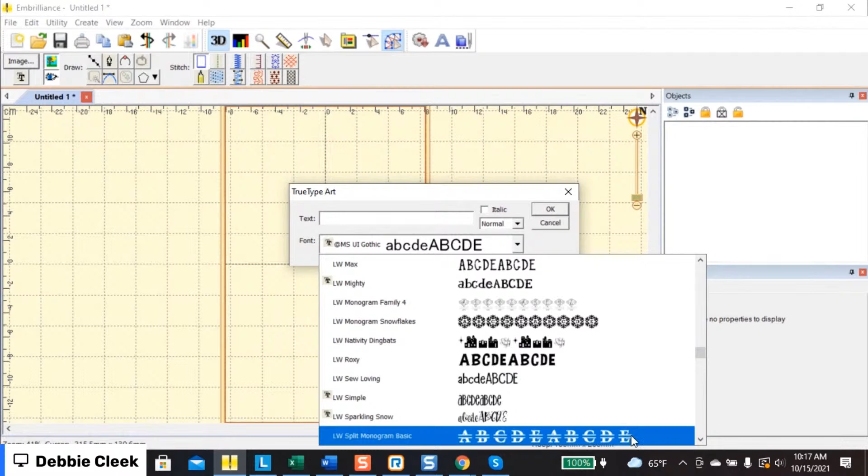The next tool here that we talk about is TrueType Art. That button, when you click on that, will open up all the TrueType fonts that you have installed on your computer. And that gives you access to virtually unlimited fonts. I'm just scrolling through these real quick. Oh my goodness, this is a split monogram, which is still really popular right now.

But look at all those fonts that I have, and a lot of these were preloaded onto my computer. Now, I've added to those, which is the beauty of using TrueType fonts. You can add to those, which is kind of fun. You'll see I had some specialty ones in there, some state frames and things like that.

So that would be how you would create your text in StitchArtist, and that is the same in StitchArtist level 1, 2, and 3. And now is also a good time to tell you that what you see in level 1 is also carried over to level 2. So when we move over to level 2, we're just going to cover what's installed or added in level 2.

Sorry about that confusion. The next tool would be the show or hide your background image. Let's see if I can undo this. Here's my background image. If I want to hide that, I have a show or hide background image button.

And then I also have a show or hide stitches. Let's come over here to our draw section and use our draw with points tool, and draw real quick some stitches. And this is your show or hide stitches. See, now you can see the stitch. Let's change it to a satin border and hide our stitches and show our stitches.

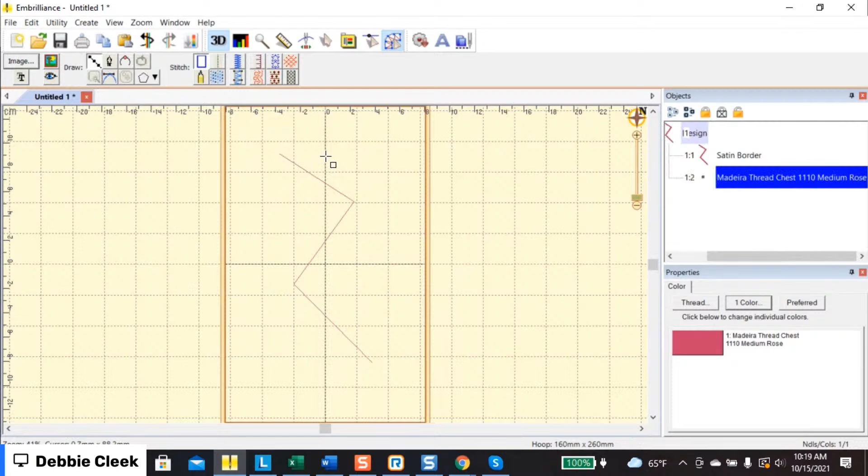Okay, our draw with points tool can be used to draw the straight line as you see here. It can also be used to draw with the curve by holding down the Shift key. So let's pick up that tool once again, hold down my Shift key, and you notice now my little nodes are circles as opposed to squares.

Hold down your Control key, and you'll notice your nodes are circles as opposed to squares. Hold down and right click when you're done.

Holding down your Shift key gives you circular nodes that you can then adjust your curve and cusp with. So your Shift key gives you one kind of curve, your Control key gives you full-blown drawing with curve.

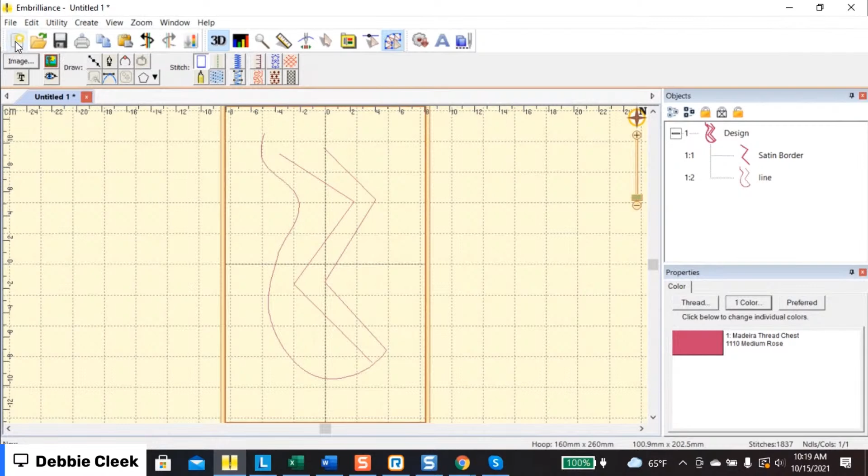Let's get a new page and draw a little bit with the freeform drawing or freehand. We'll click on that, and that allows you to draw freeform.

But you see all those nodes there? Wherever you have a node, your needle has to make a hard drop. So this would require quite a bit of digitizing before it's ready to go to the machine.

That's why we always recommend, if you're using the Draw Freehand tool, use it sparingly and practice a couple of times before you do it to make sure you have a nice fluid movement. The more fluid your movement, the less nodes you'll have.

See that right there already has less nodes than the first one because it was a little bit more fluid and quicker.

Okay, I'm going to get another new tool. We'll go through quite a few pages as we're going through this, so don't be alarmed. The next tool is drawing a 3-point circle or an arc.

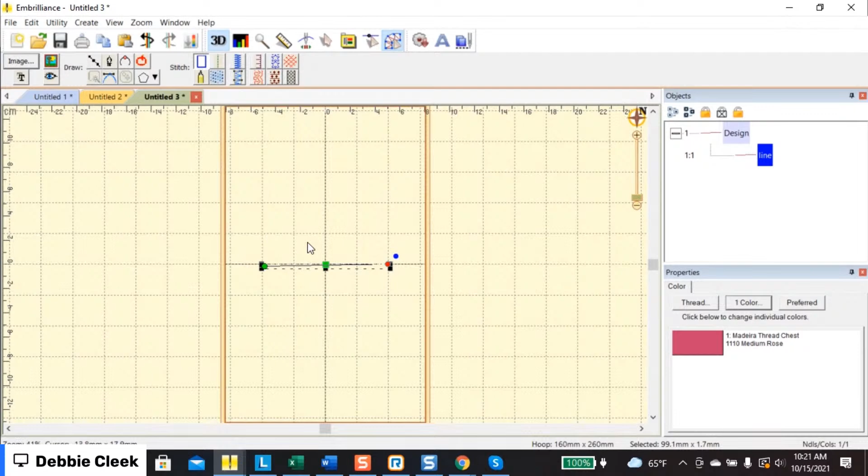I'm going to click on that tool, and for that I'm going to click here and draw it up. Let's delete that. I right clicked when I should have clicked.

There we go. There's our arc. Now you see I still have that tool there, so I can click and make more arcs if I wanted to.

Apply a running stitch to that and make like a stippling. That would be fun, but make sure you're showing your stitches. There we go.

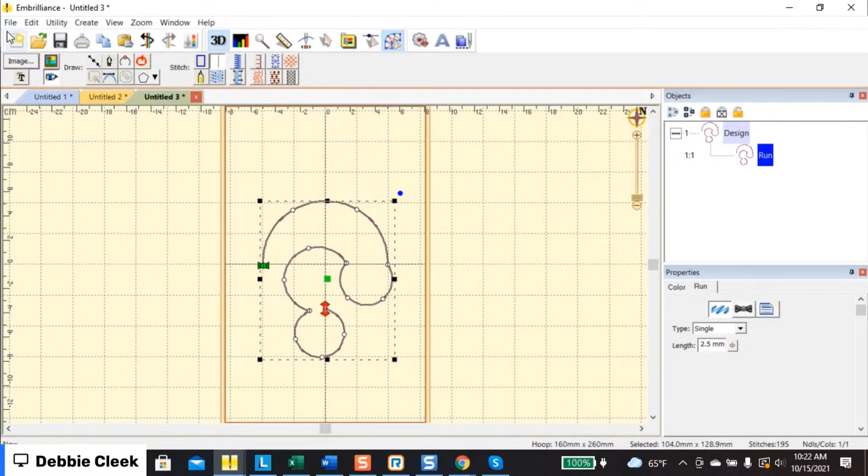Okay, we'll get another new page. The next tool is the automatic closed shape tool. So let's go back here to where we drew our first one.

Let's select this tool here, and let's click on our open close shape. You notice how it automatically closed that shape?

You see that? Now I can also open that shape, and I can close it again. So remember you've got an open and close shape tool as well.

You also have a magic wand. Now, this magic wand I won't show you—I don't have any artwork to magic wand with, but I will explain it to you. The magic wand that comes with this is called a shape magic wand.

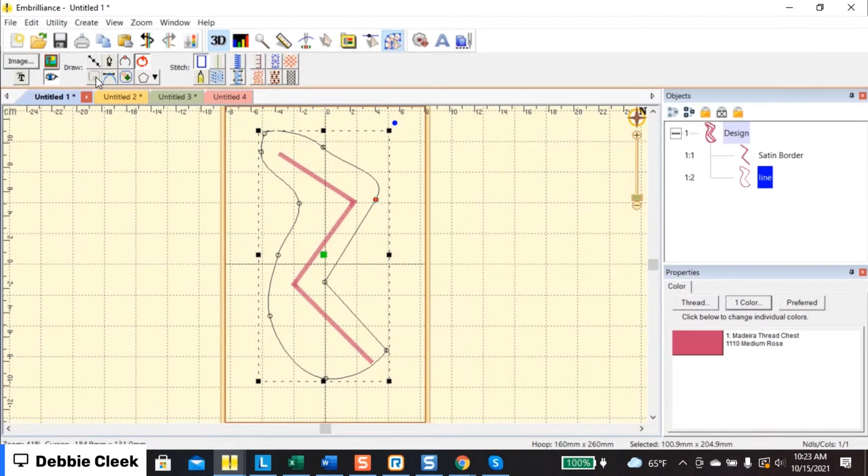It will give you the outline of the shape that's selected. So when you have, well, maybe I will. Let's see. Let's go here to page 4. Let's go to image.

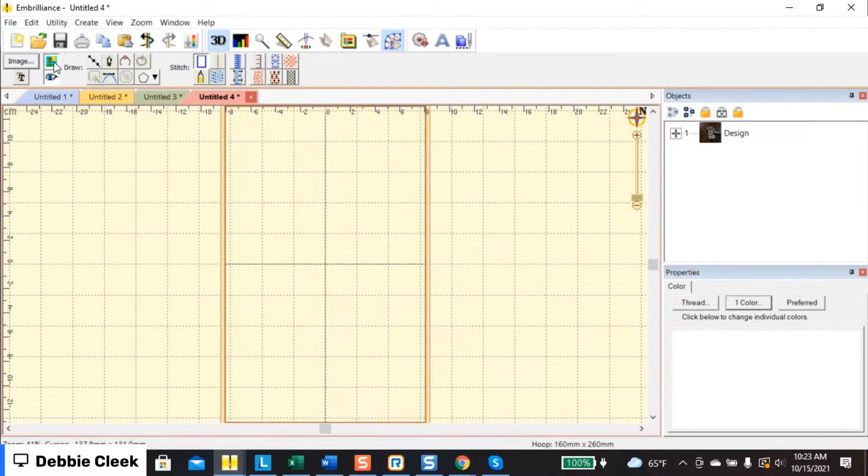Show our shape. Okay, now I'm going to use my shape magic wand.

It is going to look at the different colors and try to give me a shape based on that, but this actually is my desktop, so it's got a bunch of different wood grain colors, so you're not getting a clean outline. But imagine if you had some nice, clean, crisp artwork—what a lovely job that would do, giving you an outline with just a single click of the mouse.

Let's get a new design page. This one here, your line edits as a spline with handles, or with a spline with no handles, or a bezier with handles. So let's draw some

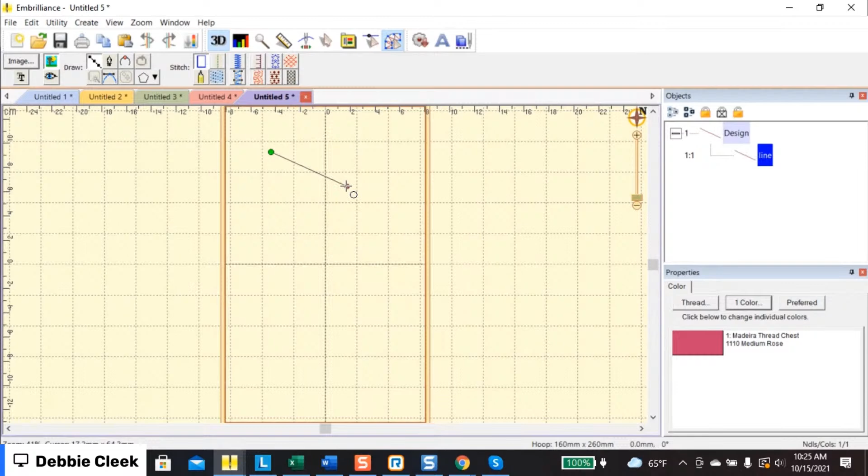lines with curve, and it's my closed shape line. My closed shape tool is turned on, so I've got a nice closed shape. That's a better shape to work with, so to see.

And you see these handles here? With the Bezier, these are my Bezier handles, and they allow me to adjust my curve without adding any nodes.

Now, if I turn that on or off, if I turn off the Bezier handles, then you don't have the handles to adjust by.

And the only way then to adjust this shape is by adding additional nodes. Now, remember what I said earlier, wherever you have a node, that needle needs to make a hard drop.

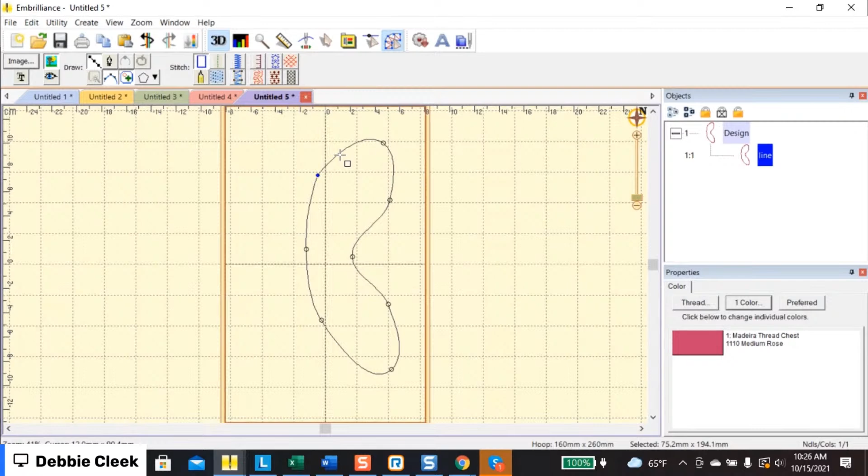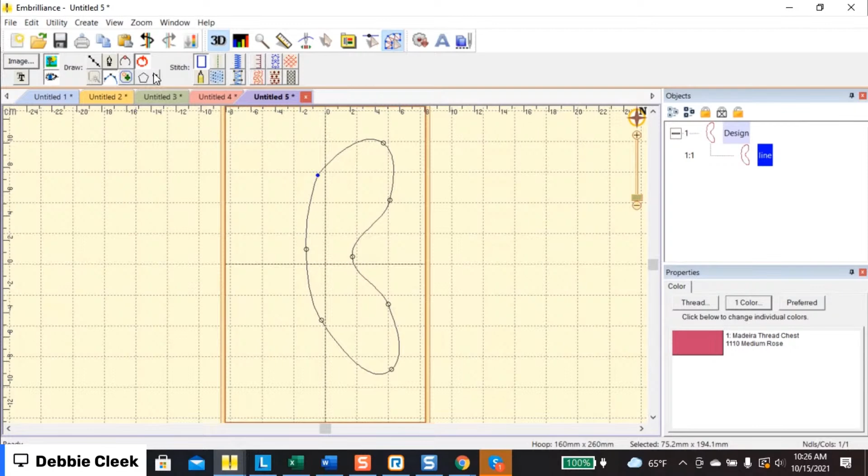So the fewer nodes, the smoother your overall artwork will be, and the smoother your overall stitching will be. Okay, now that we have a shape on the design page, let's add a hole to that shape. And I'm just going to come up here and draw a circle with my automatic shape tool.

Okay, now I'm going to hold down my shift key and select both of these. And then I am going to right mouse click on, hold down my shift key, select both of these.

Select both of these, right mouse click, combine with hole, and now I can fill that with some fill stitch, and you see I have a hole in my area where there will be no stitches.

I don't know why that section always gives me a hard time. It's create your area, add your hole, select both areas, and then right mouse click and select combine with hole. It's a very simple process.

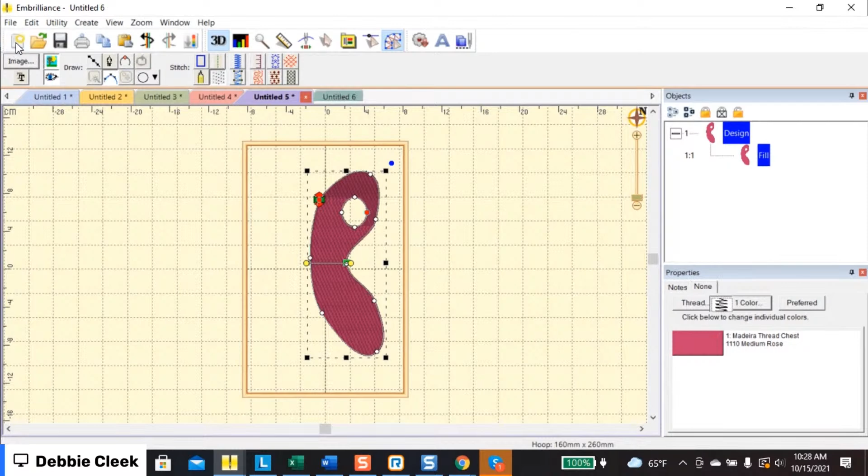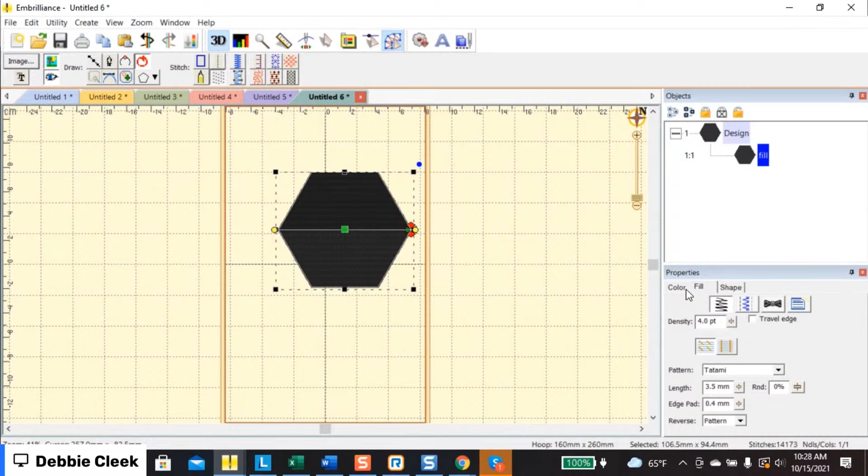Now, the next tool we're going to talk about is the automatic shape drawing tool. I can draw a rectangle, a circle, a polygon, a spiral, or a star. And the beauty of that is, let's just draw a polygon real quick. And actually it's 6-sided, so what would that be? And it's filled. Instead of turning the fill off, let's just change the color.

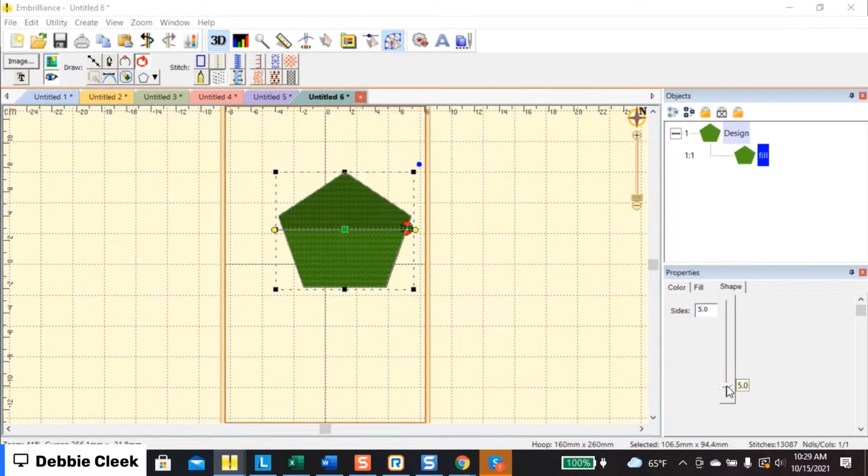Now if I come over here to my Shape tab, I can adjust the number of sides I have. So if I wanted to make some tessellating designs, it's very easy to do with these quick and easy to make shapes.

Now I can tell some of you are looking at this and wondering why this line is in the middle of this. That's because my start and stop points are basically in the same place. Let's take my stop point and put it down here at the bottom. Let's take my start point and put it up here at the top. And you see that section is gone.

Okay, who's ready to look at stitches? I know I am. We've covered the image part of the drawbar. We've covered the draw part of the drawbar or tool pane. Now let's cover the stitch part. Let's start with the shape we already have drawn and talk about the fill stitches. When you click on your fill tab, you have a pattern option here where you have a number of different patterns you can select from.

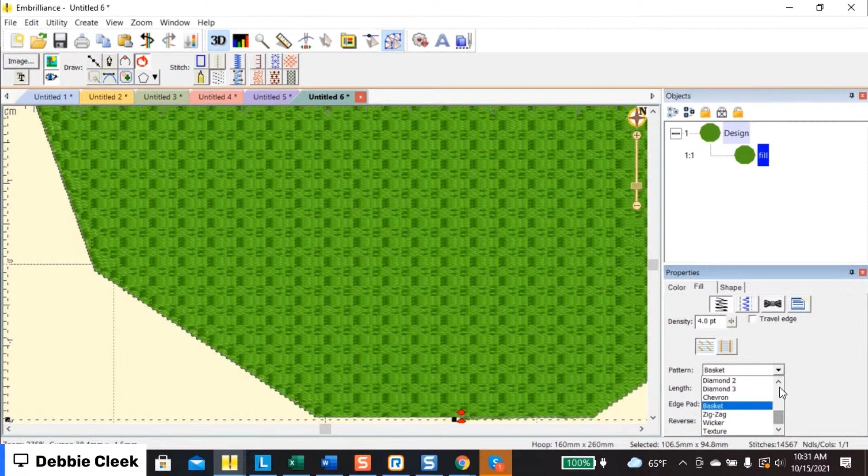That's the basket weave. My personal favorite that shows really well is the waves. So this is a quick and easy way to add texture to a design without having to spend a lot of time, and give an overall pattern to your design by changing to a different fill stitch.

Say you were making a boat and you wanted to put a little rectangle at the bottom and have some little waves in there. You can rotate this pattern as well, or rotate the shape. Either way, it's rotatable.

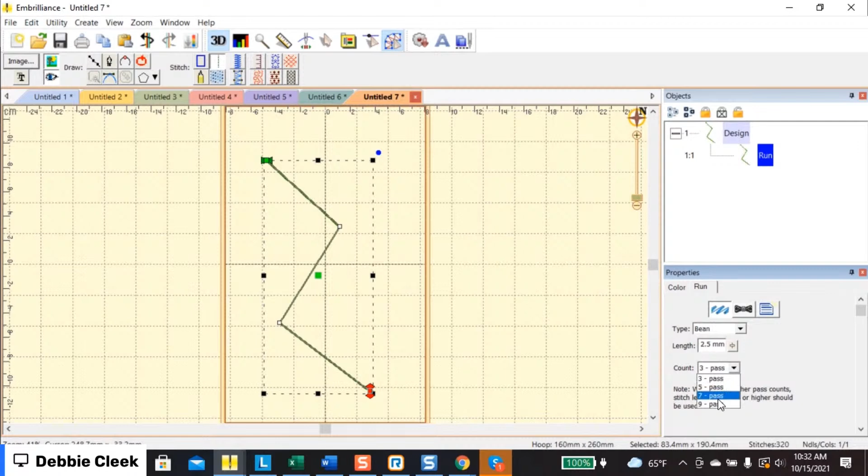Alrighty, for the next one, let's get a new page. You notice I keep going back to my draw with points, and I'm just going to draw a shape, and we're going to go to the run tool. With the run, I have a single run, a double run, a bean stitch. With your bean stitch, you have a 3, 5, 7, or 9 pass, which means if you want to make some of those big floss looking designs, you can with your 9 pass.

Just remember to lengthen your stitch, otherwise you're going to have all that thread bunched up in a short stitch length. So you want to lengthen your stitch to at least 4 millimeters or higher, as it says in the note here. See, we give you handy notes to make sure that you don't run into a knuckle like I did.

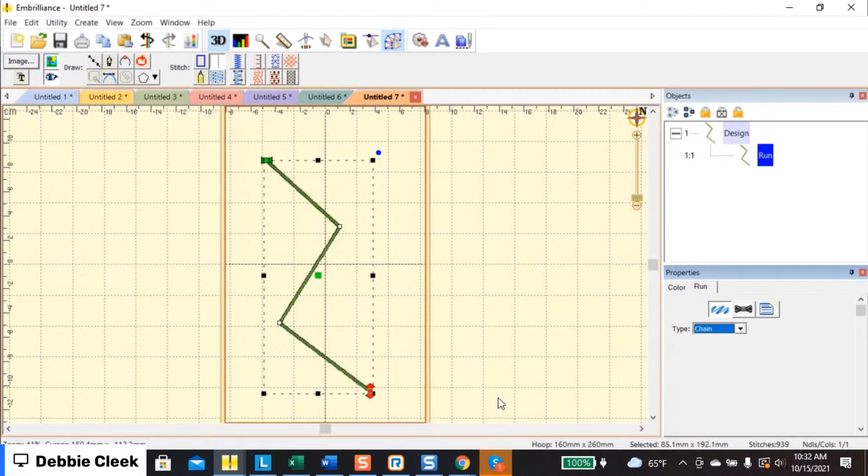Okay, after the bean stitch, we have a chain stitch. Let's zoom in on that so you can see what that looks like. We have a back stitch, a stem stitch, and finally a faux sashiko stitch. This is designed to look like a sashiko stitch.

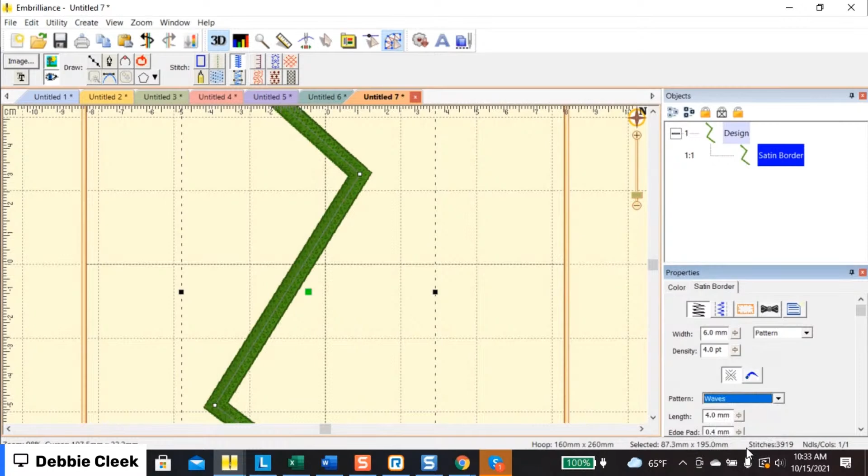Okay, from there we'll select that design, that line, and move over to the satin border. We'll zoom in a little bit, but not quite so much. What I like about the satin border is you can apply texture by applying a pattern to your satin border as well. If I made this stitch width wide, let's make it 6 millimeters wide. Then I can apply waves to that. Let's zoom in on that so we can see.

Let's go back to our regular tatami. You can also feather your edge, make it a 3-pass whip or a 5-pass whip. You can also make it a split stitch if I wanted to make this a 3-column split. There, see, that can give you an interesting look, kind of gives you a ribbon look.

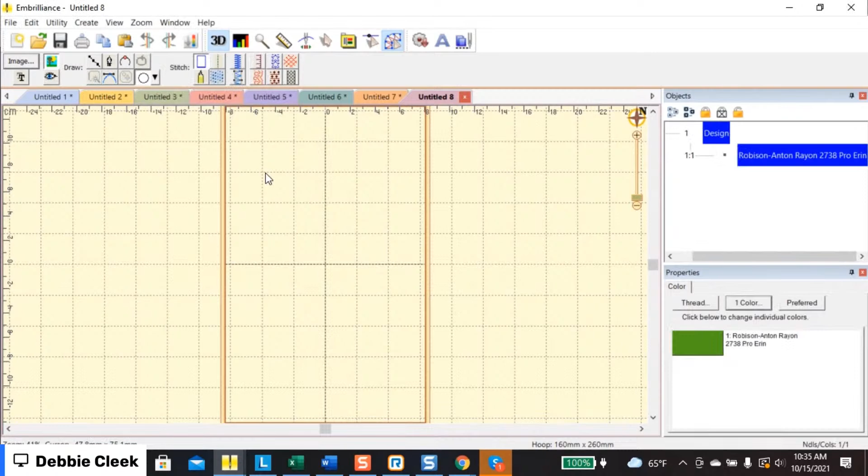Okay, let's get one more new page. I'm going to come over here and I'm going to get a shape. I'm going to bring in a circle. We're going to talk about applique. With applique, I can make a one-click applique, and then I have the option of selecting from the E-stitch, the blanket, the satin, the zigzag, or none if I wanted to do some raw edge applique. So you have several options there.

You can also do a fabric preview. You can do a position as well as material placement stitches as well. So a 2 or a 3-step applique. Okay, so that is your applique.

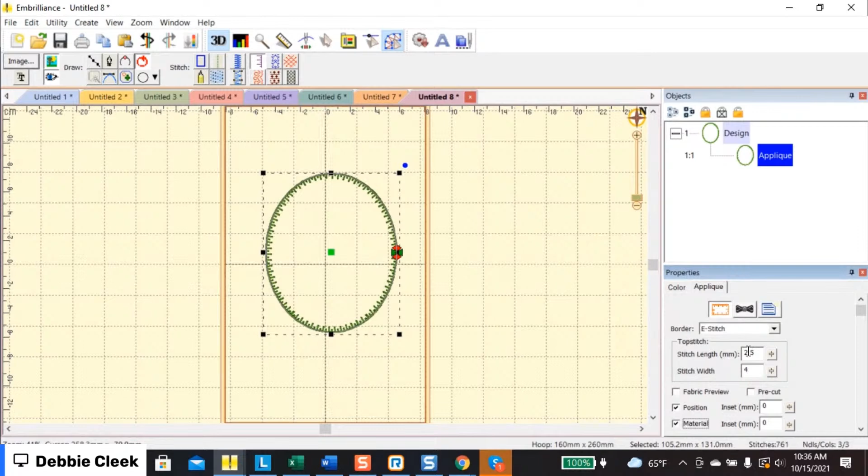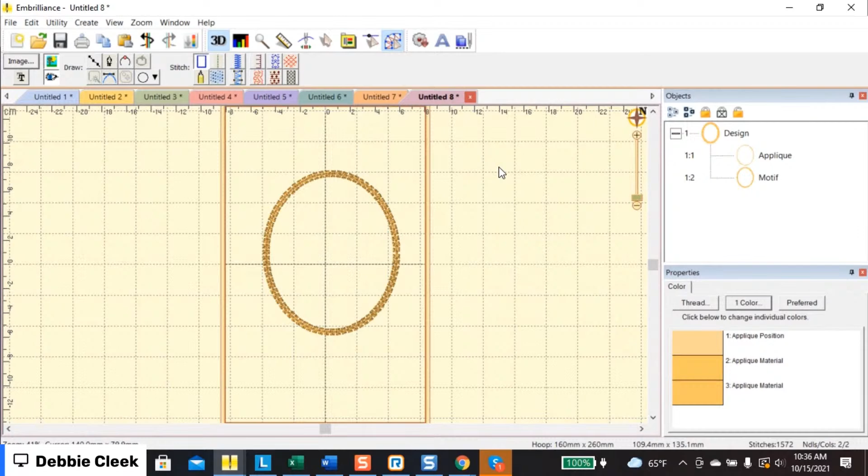Now, say I wanted to leave off my top stitch, make it none, then I could copy this and paste it. Then I can come over here to my motif run and put that around my applique. Let's zoom in on this so we can see it a little bit better.

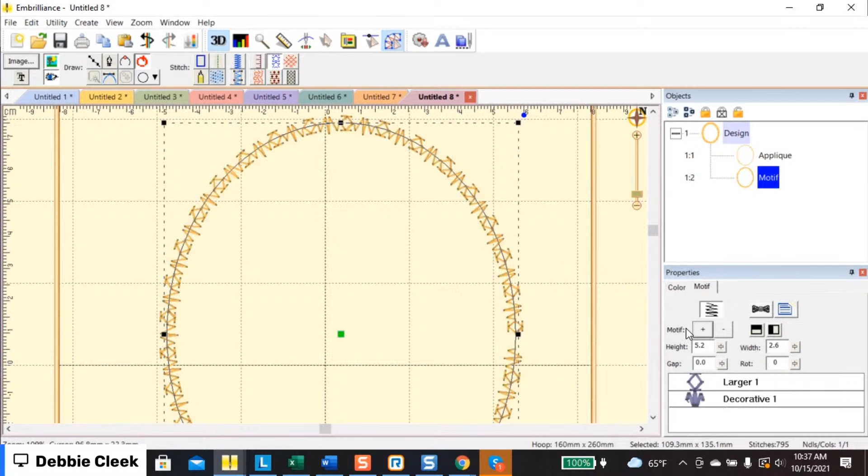Okay, now with that, I can also add, let's go to decorative. I can adjust the size of that particular one. I can go to motif and add a different one. I can add as many different motifs as I would like to get just the look I'm looking for.

Okay, so that is your motif fill, or your motif run, I'm sorry. That is the motif run. Right below it is the motif fill. And we'll talk about that one in just a few minutes. We'll work our way over to that one in just a few minutes.

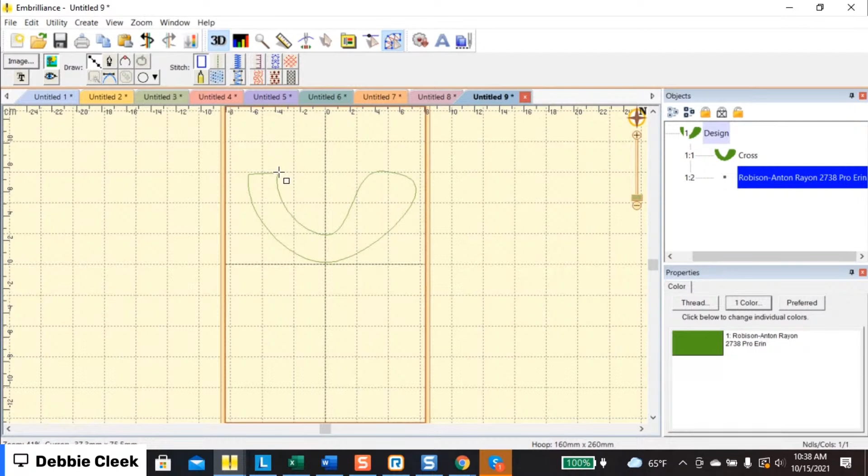The cross stitch area. Let's get a new page. I'm going to hold down my control key and draw. Close my shape. And I'm going to fill this with cross stitch. And then I'm going to come in here and use my draw with points tool again, holding down my control key, making a curve shape. Close my shape again. Let's adjust this a little bit here. Let's see if my Bezier handles are on. Yes, they are.

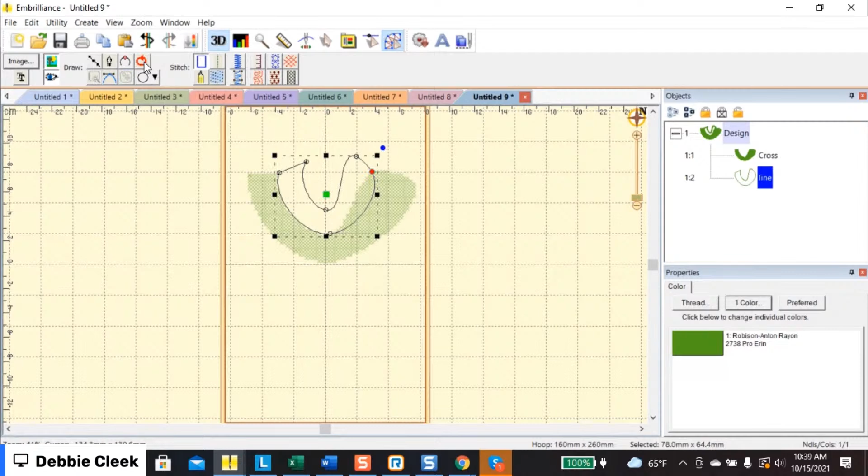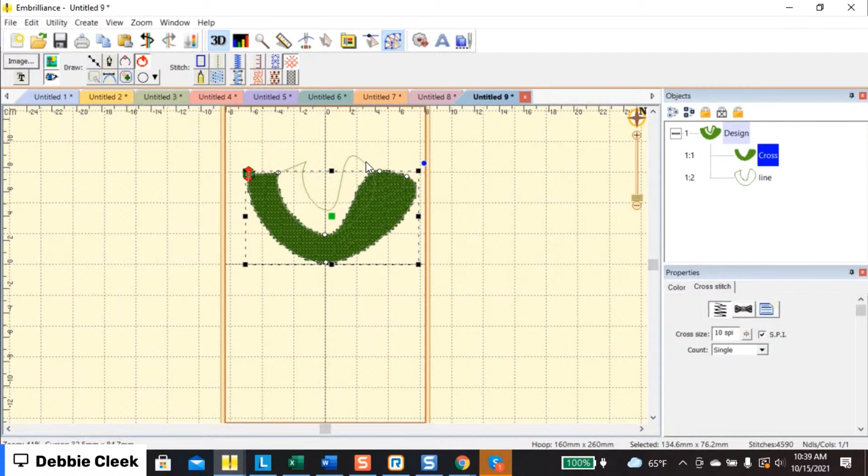So I can adjust my Bezier handles. And let's change the color of that. And let's zoom in so you can really see how those X's all work off the same grid. So if you were trying to make a design to mimic the look of counted cross stitch, it's very easy to do that when it works off the same grid, so you can draw all your areas. And if you look right here, you can see how those X's match up.

Okay, now we've talked about the fill stitch already. Let's talk about the satin column. There we have it. You see you have a satin stitch that contours all the way around the shape of the object. That is your satin column.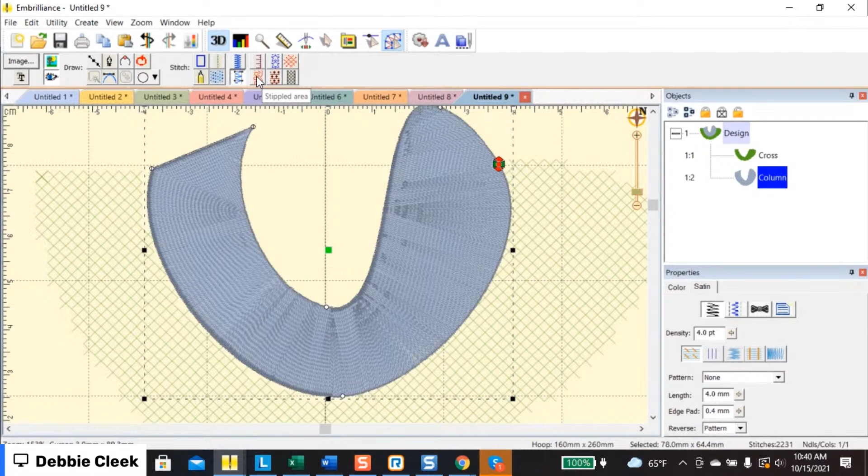Stipple area will fill that area with stippling, and there are drunkard, curvy, leafy, and geometric stippling styles.

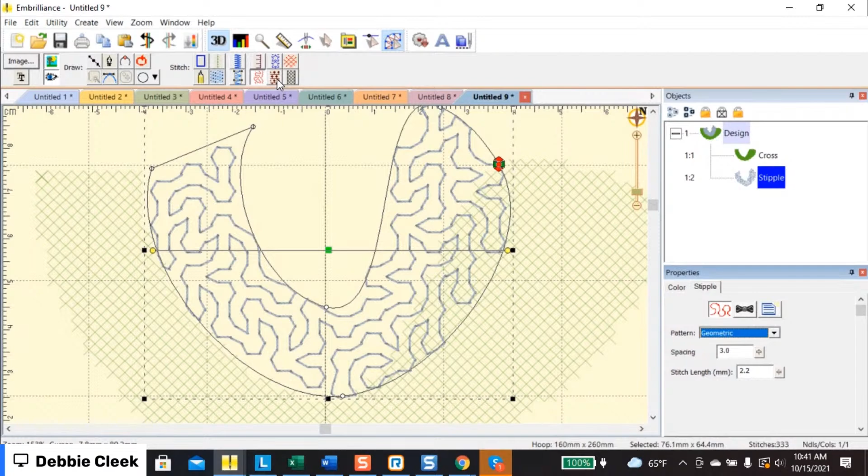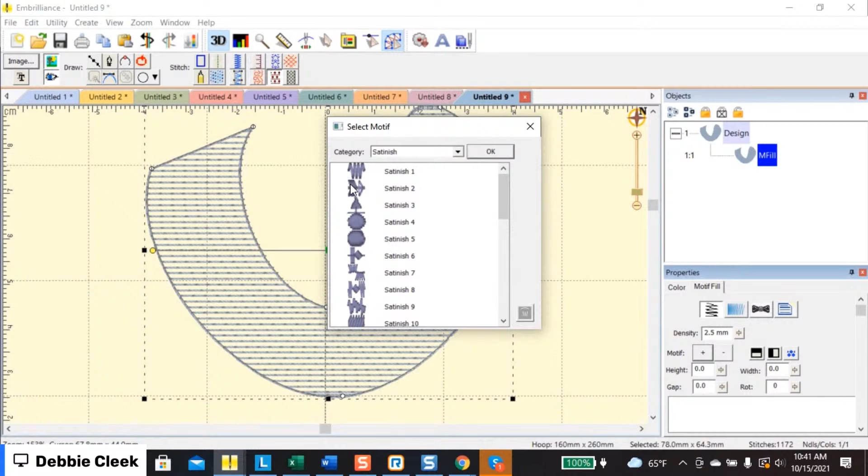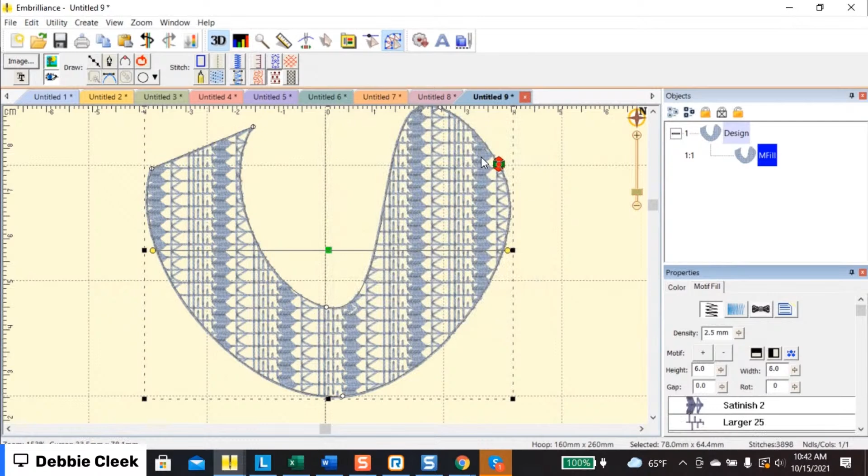Oh, now we're to motif fill. Let's delete one of these objects so it doesn't get confusing. With motif fill, it works similar to the motif outline, only I am filling a shape with the motif. So I can come up here, I can select my first motif, and I have the arrows. Click on plus, go to larger. Let's scroll down. That's interesting. Let's add one more.

Let's zoom in. Let's add some space between those. Let's make this one a little larger. Actually, let's delete this one and select a different one. There we go. So it's that easy to work with the motif fills.

Let's get one more new page, and now let's talk about freestanding or quilted fill. Everybody likes to make freestanding lace, and with StitchArtist level 1, it's very easy. Let's come over here and use our quick shapes. Let's make an oval, and now it's filled with freestanding lace.

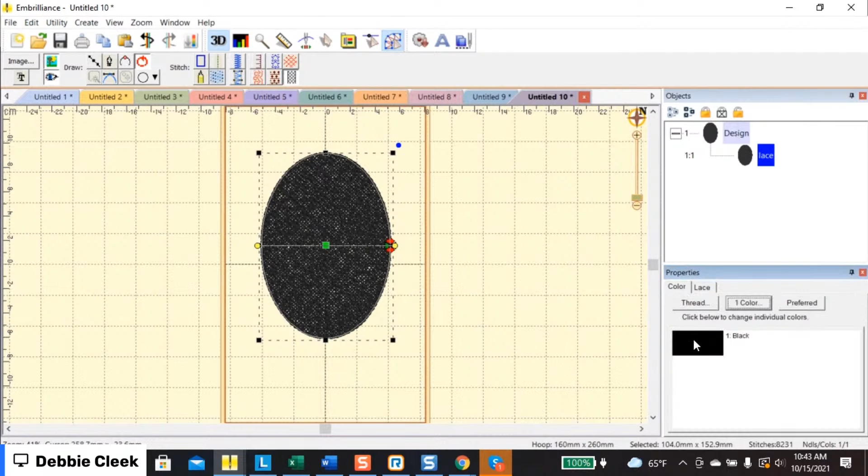Let's change the color. With lace, here it is. Here's my density, here's my stitch length, here's my pattern, freestanding double. Or if I wanted to make it single, which is not freestanding, I can then adjust my density, and I could use that for some in the hoop column quilting.

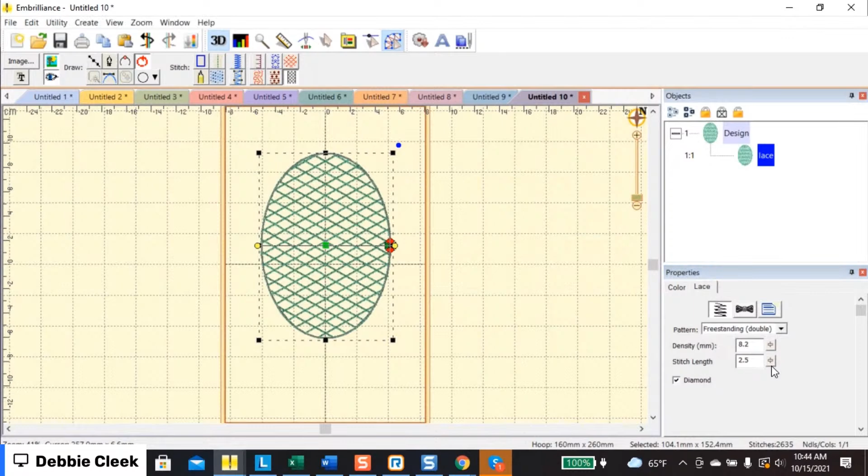Kind of like echo quilting. I can also switch it to a diamond pattern, go to freestanding lace, and then put your design or your swirls or whatever you want on top of that. And then when you rinse it, you'll actually have like some making your own fabric. You'll have a lace piece that you can attach on something else.

Okay? So let's see, we touched on in this session, we did an overview of the image tools. We did an overview of the drawing tools, and then finally, we've just finished up with the overview of the stitch tools.

Now we're going to move on to level 2 and go over those tools and do an overview of those as well. So those of you joining us a little bit late, we've just finished our overview of our level 1 tools, and we're going to start with our overview of our level 2 tools.

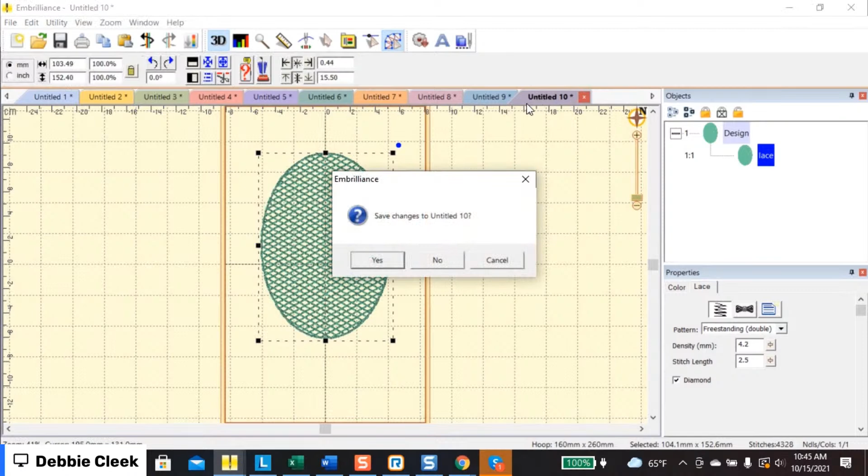So I'm going to click on my create button. That's going to give me, since I have a special version, that's going to give me the level 2 tools, and I'm going to close some of these design pages, so we don't get confused when covering the level 2. Let's get a new design page. Let's go to level 2.

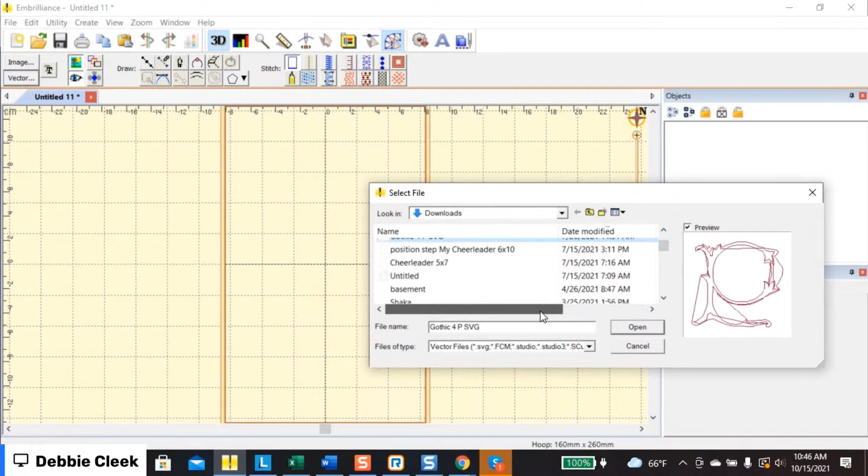Okay, you'll see right away we have a new button. We can bring in vector art. Vector art, so that means SVG. Well, let's see, let's go back here. That means I can bring in SVG, FCM, Studio, Studio 3, SCut 4, EMF, WMF, and AI. So SVG is the most common. Scalable vector graphic is the most commonly used, I think, in today's graphic arts world.

So that's probably the most easily found artwork to use for digitizing. But a lot of these, like the FCM, the Studio, the SCut 4, those are for the Brother Scan and Cut, the Silhouette, and the Cricut. And then these EMF and WMF are just some commonly used graphic formats. And I think AI, that's Adobe Illustrator. That would probably be your last resort if you were looking for some artwork to bring in, only because it's very version specific.

And I don't know how current a version of AI we currently bring in. But that is one of the things that is added with level 2, is the ability to bring in vector art. You also have here sequence objects by selecting them one at a time.

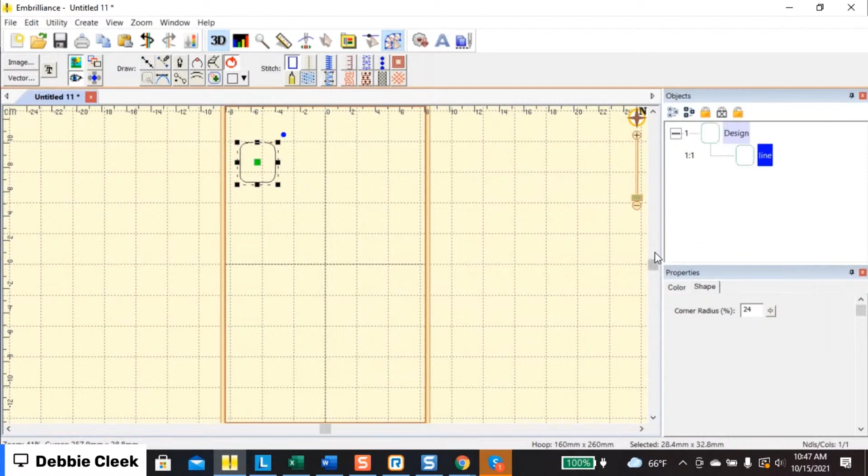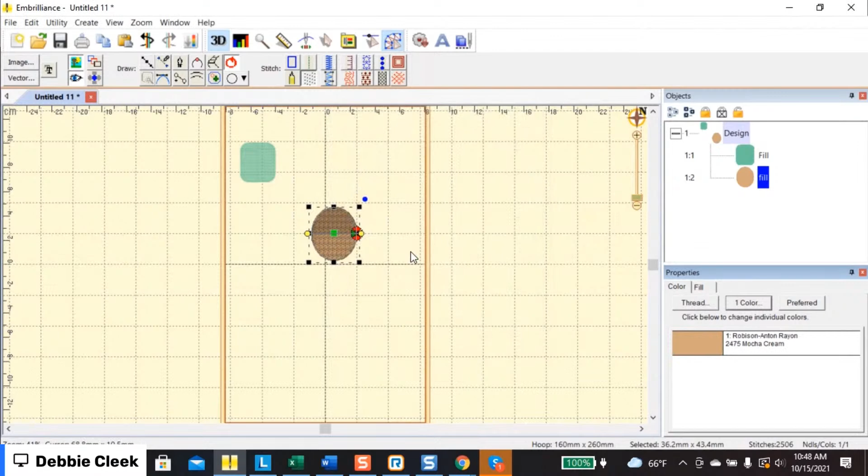So let's put some objects onto my design page so we can show this. I'm just going to do a square and fill it with some color. Let's do a circle, let's fill it with a different color. Let's come over here and do a polygon, and to keep from being confused, let's reduce the number of sides down to 6. Let's change the color of that one as well. And one last, we'll make a star.

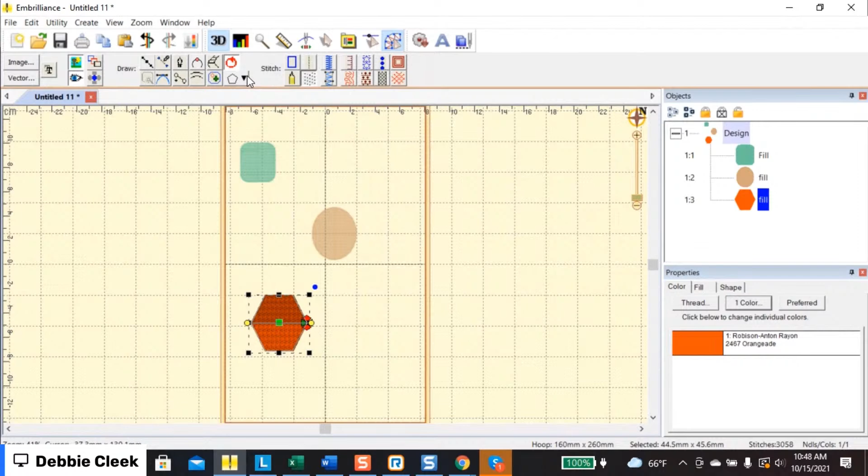So I'll come over here and select my sequence objects by selecting them on my design page. Green, and it will adjust the sewing order. So let's go back and do that again. Green, orange, tan, and blue. Green, orange, tan, and blue. Just by selecting on the design page my sewing order. So there are times that can be so much simpler to do it that way.

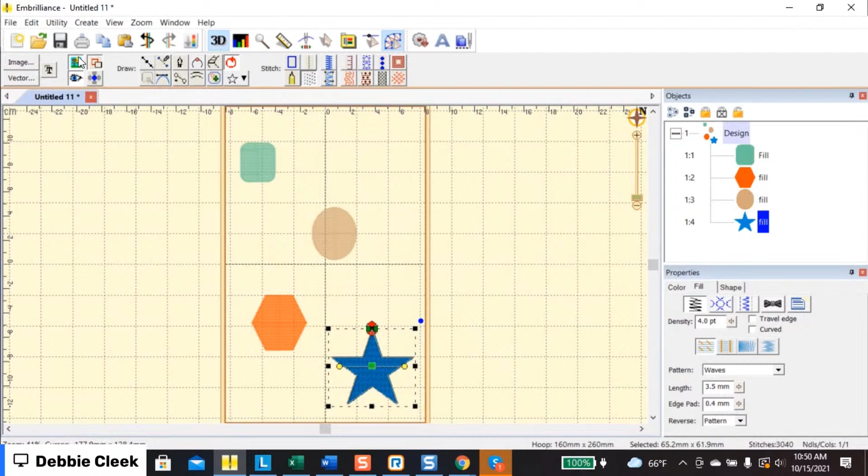What else is added? The ability to draw with the Bezier. Let's get a new design page so we can talk about that one.

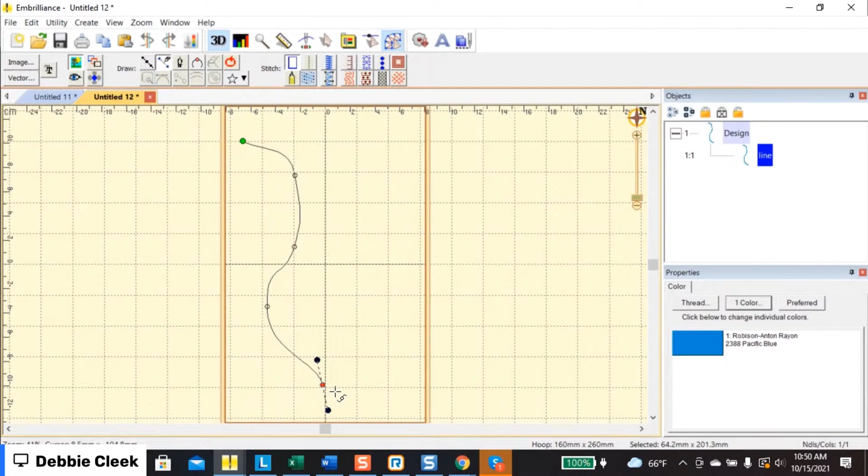Before you could draw with the curve, now I can draw with the Bezier, which means I have the handles that allow me to click and drag and create my curve as I go, making a nice S curve. Right click when I'm finished. That is the Draw with Bezier.

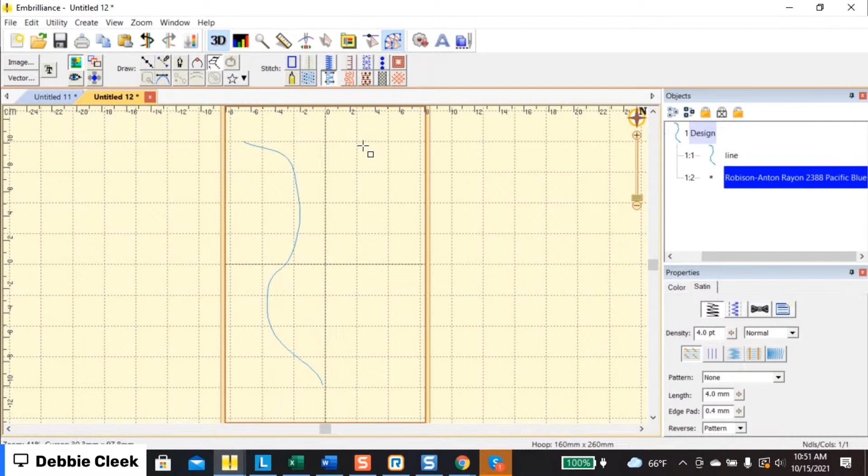The next tool that is added is Draw a column with left and right alternating input. This is great for making, well, let's just show you, making a satin column go around a curve. And then I can come over here and select these and edit them.

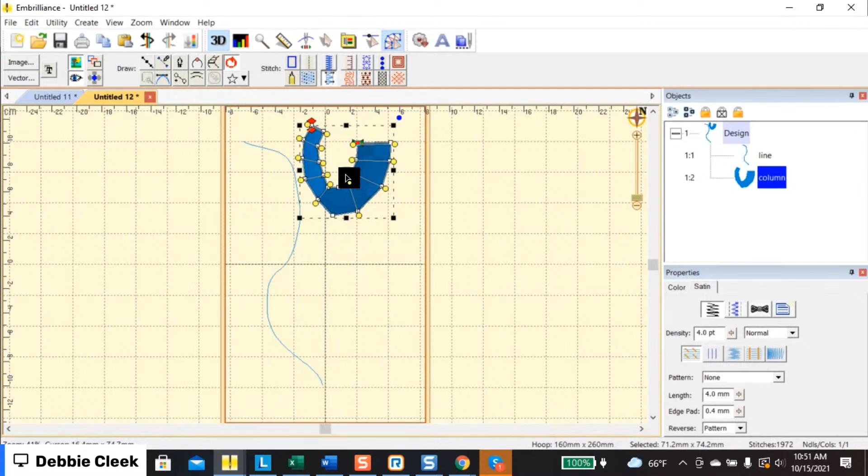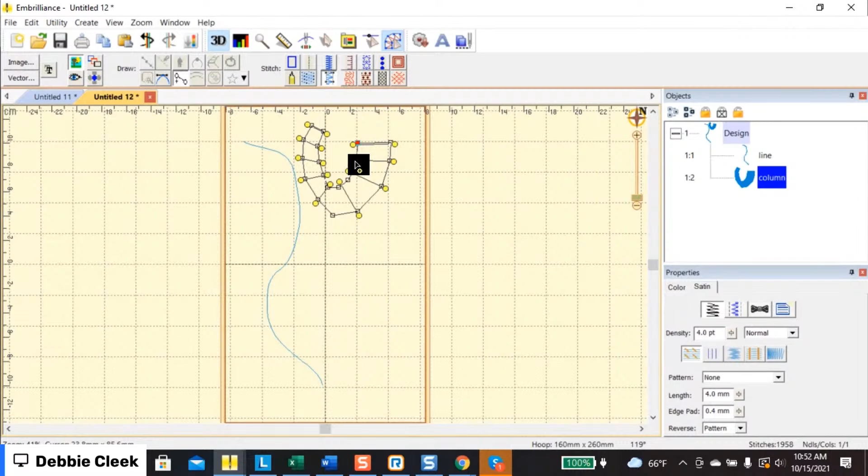These are my inclination lines, and that has been added, so I can add inclination lines. So if I wanted to take these off, I can add, let's take this one off too, and let's add one right here in the center to make that transition a little smoother. These inclination lines are fully editable, which means I can edit them, move them around and adjust them however I want, or I can also add additional ones. Right click when I'm done, then I can edit the ones that are there.

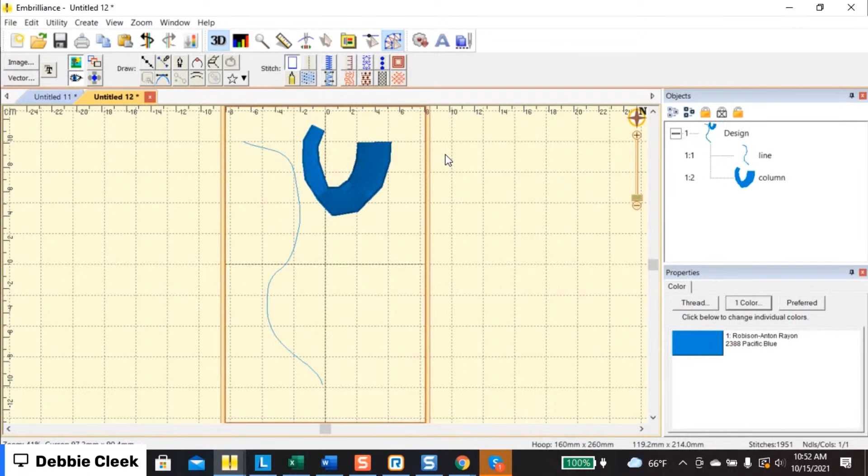Let's zoom in on this and see what we got. Not too bad the way it goes around that curve.

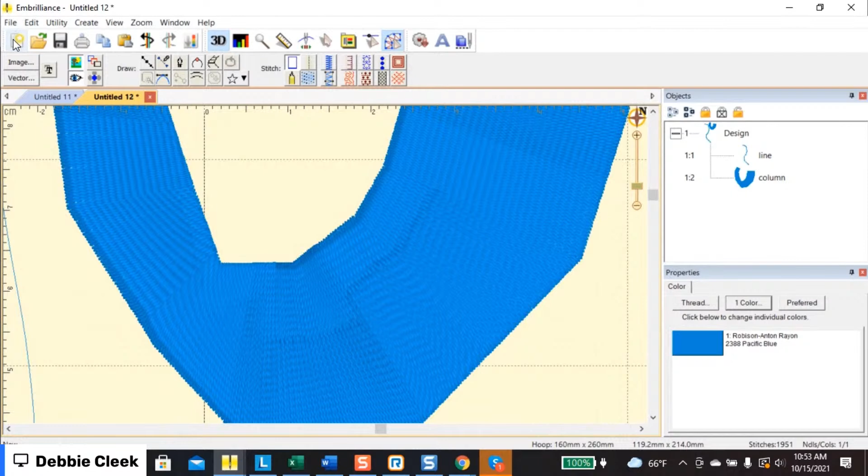The next tool that's new in level 2 is the draw a column by making two sides. So that is good, it's right now it's jack-o'-lantern season, so it is a lot of fun to use that tool.

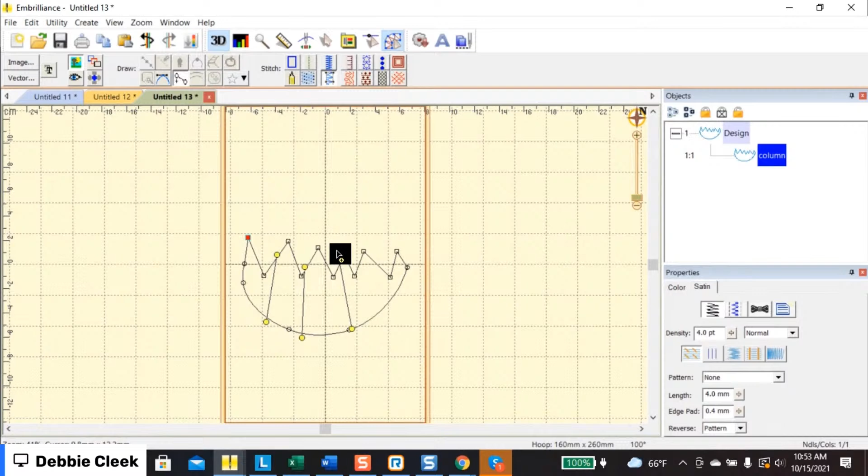I draw my top, then I right click, and I draw my bottom, then I right click and it connects these two together. And now I have my inclination, so I can draw my inclinations, because with level 2, what was added? That's right, the ability to add inclination lines. So I can add my inclinations here, right click, and there it's finished.

Okay, let's get another new page. Now that, I believe, is all that has been added in the drawbar in level 2. Remember the draw with Bezier, draw a column with left and right alternating input, and the make a column with 2 sides, and the ability to add inclinations.

Okay, now over here in the drawbar, you have the ability to draw with motifs such as French knots and candle wicks. Let's select candle wick. I can make these larger. I can make the end size smaller. I can adjust the gap between them. Or I can make them all the same size, and I can also switch to French knots.

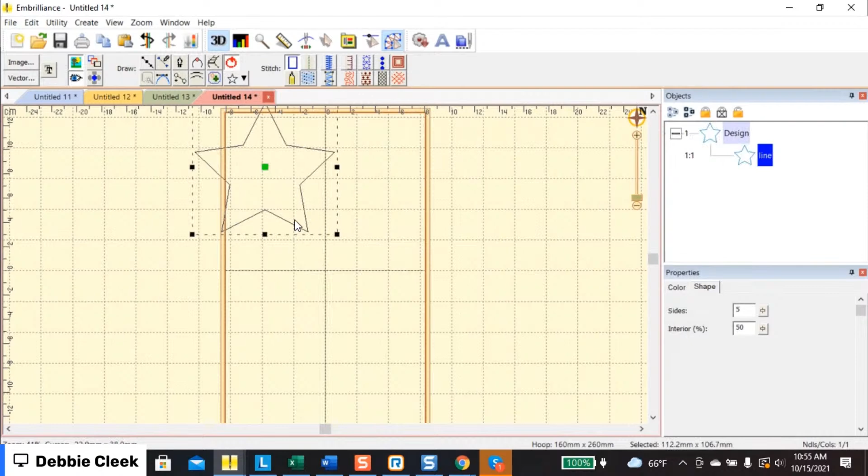The next one is contour fill area. So let's just delete that page. Let's come over here and grab the star. Let's fill it with some contour fill.

Let's go to our contour tab. Let's make it gradient. And let's not clip the shape. See how it's far apart in the middle and it gets a little bit closer on the outside? We can reverse that. Maybe not quite so much. There we go.

This slide bar here adjusts the offset, the spacing between each one of them. So each level of stitching, I have an offset, and that will adjust the distance between each row of stitching.

I can echo outline inward, interior clipped, or outward. So if I want to do some echo quilting, I could just echo that outline outward. And there I have some quick and easy echo quilting if I were doing some quilt blocks in the hoop.

Okay? What do you think of that? I think that's a pretty groovy feature. I really like the echo quilting option.

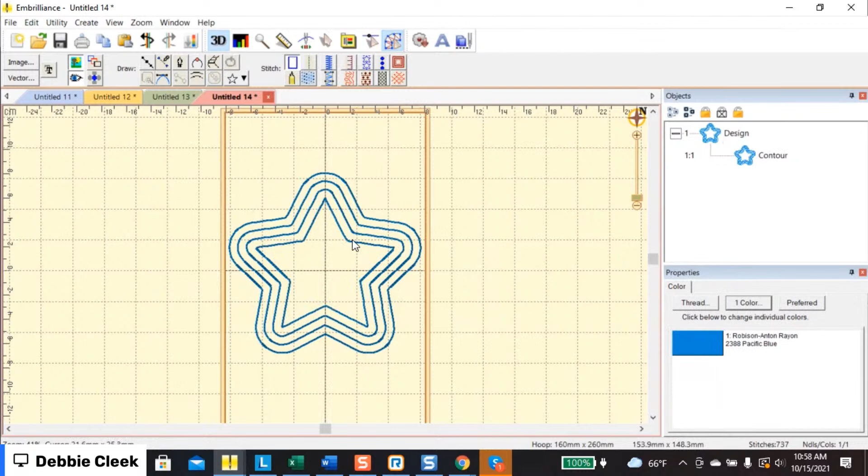And I believe if I select each one of these rows of stitching, convert to curve. No, it's not what I want. But you can make each of these, just in case one of you were wondering, because I know someone out there was wondering if you can make each of these a different stitch. And yes, you can, that is a possibility.

I would show you, but I've got to hurry off to show StitchArtist level 3. So let's click on the little icon here. This is StitchArtist level 3, and you'll see a whole lot has changed. A lot I'm just going to explain to you because there's not a whole lot to see with this.

In your image window, image bar, you still have your show or hide background image, your show or hide stitches. You still have your sequence objects by selecting them on the design page.

And you still have the continuous view mode, which gives you an overview of what things might look like if you wanted to repeat them on your design page. It doesn't copy and paste them, it doesn't stay there to give you a preview so you can put them there. It just gives you a quick little overview, and then you can decide whether or not you want to copy and paste and try to align things using the other tools in the program.

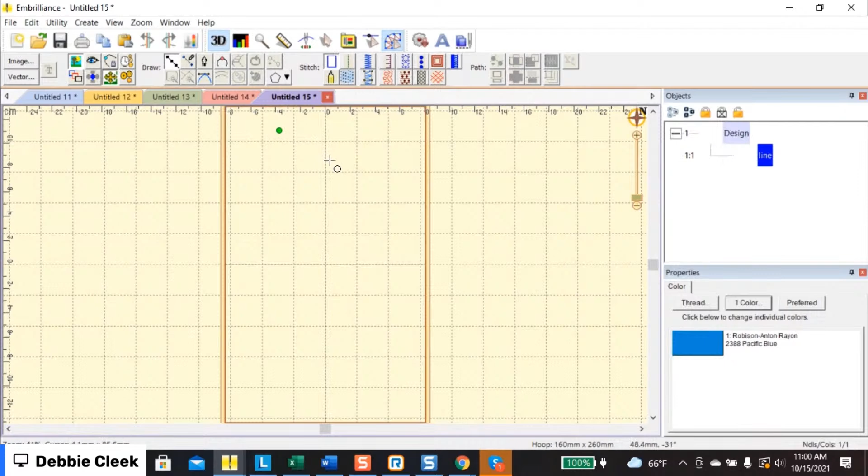This tool here is kind of fun. This is the default drawing with line or with curve. Now with all the other versions of StitchArtist, you notice I was drawing with a straight line because I wasn't holding my control key. Now with this one, I can draw with the curve and not have to hold the control key.

This allows auto scroll. So if I wanted to come on... if I wanted to scroll off the page or through the area, auto scroll allows you to do that.

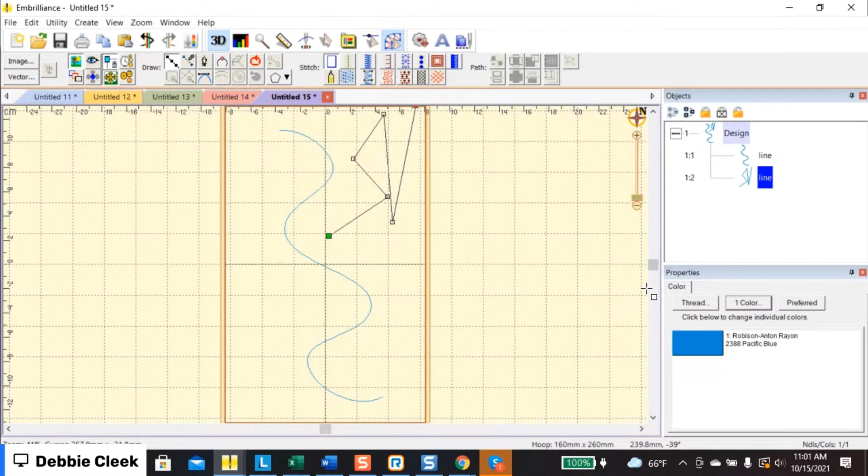And I can't for the life of me let you know why this is not working for whatever reason. It's just not working for me today. Another knuckle. Because it should scroll through the design page, like that. Okay, see how that auto scrolls? I guess it just needed to be zoomed in.

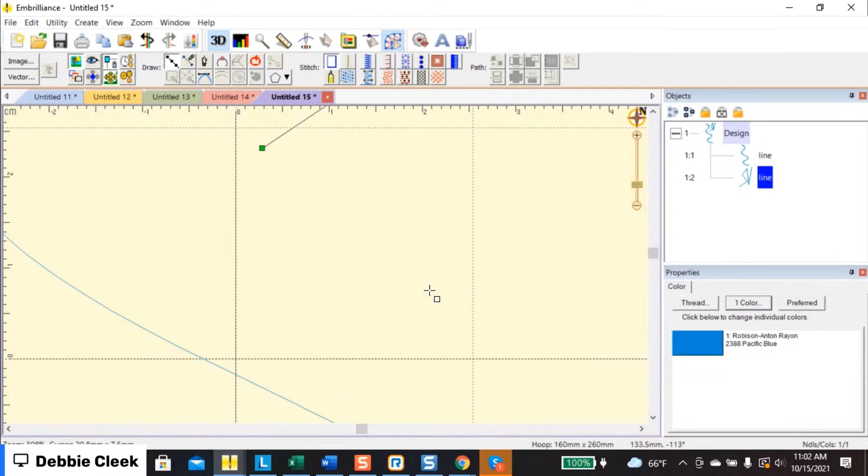Now, there will be times when you're going to be working on something very detailed and you're not going to want to generate your stitches right away. And that's what these next two buttons are. They're generate stitches now, and then delay the generation of stitches. Because if you notice, as I've been drawing, stitches generate immediately. There might be some times when you don't want that to happen. So then you just delay your generation and then select generate now.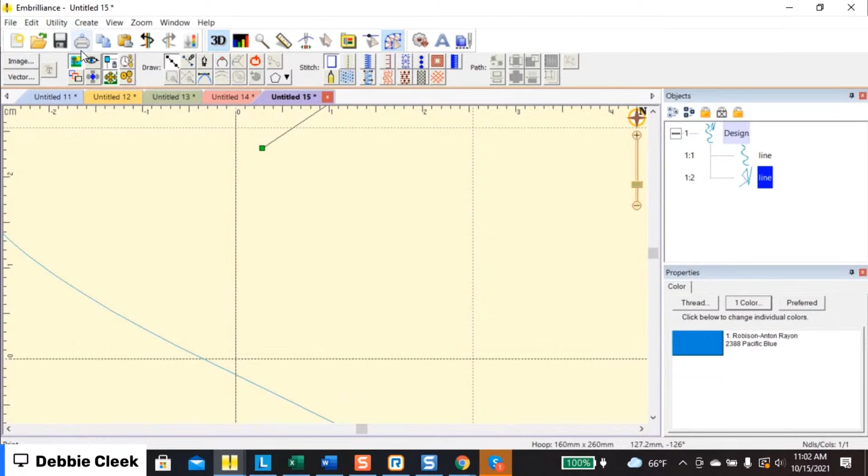Let's get another quick shape. Let's get a circle. And let's go to the stitch bar and talk about what's new there.

There's only one new stitch there, but it's been getting a lot of attention lately, and that is the merrowing stitch. What that does is it gives you a nice mock merrow stitch that does go around and cover part of the back of your design. It sends a little bit of extra thread to that stitch, so you get a more wrapped edge than you do with a satin stitch. It's a lovely, beautiful stitch, especially if you're into making patches. You can trim around the outside, you can stitch on water-soluble stabilizer and rinse them. You have a number of options that you can use this stitch for. It's a fabulous stitch.

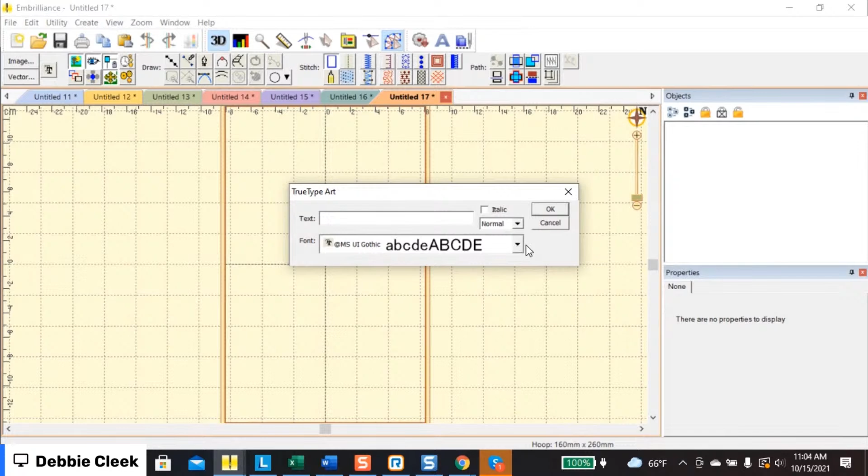Next, in level 3, the big thing that's been added are all of the pathing options here. Let's go through some of them. I'm going to get a new design page, and I'm going to bring in a piece of true type art. Let's make this larger.

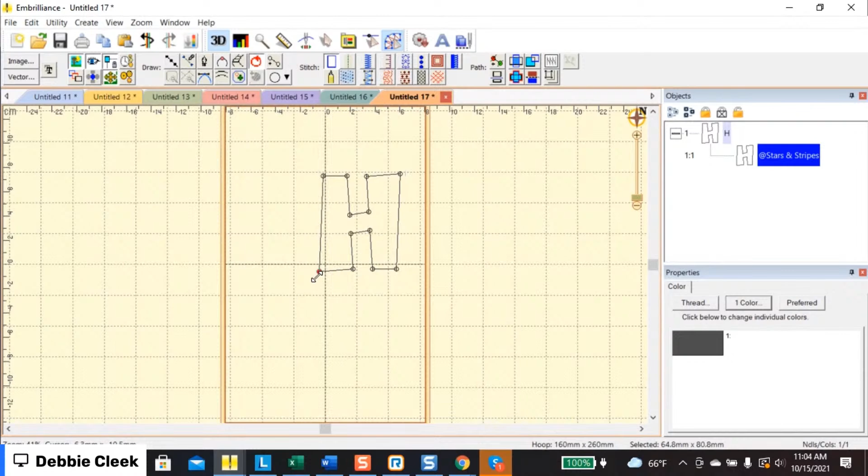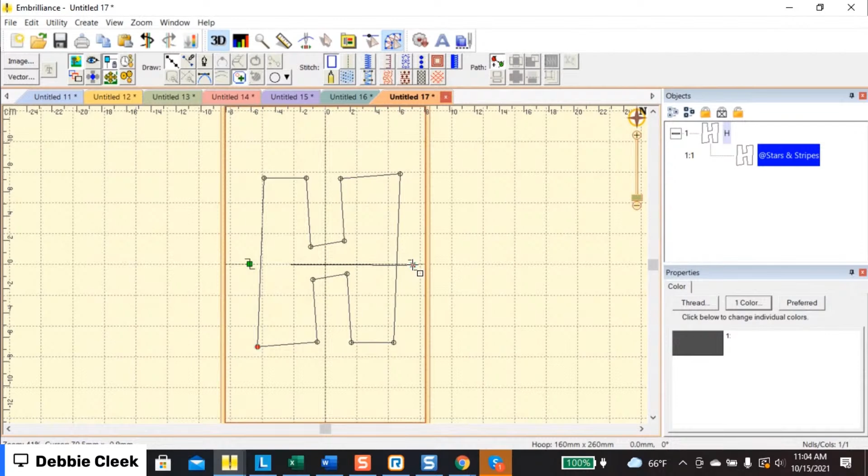Okay, first tool is to add a break line to a closed shape. If you do not have a closed shape, this tool will not be selectable. So I have a closed shape here, so I can add a break line to this closed shape. There we go, right click when I'm done. Now what I'm going to do is cut the object at the break line, so now you see I have a top and a bottom.

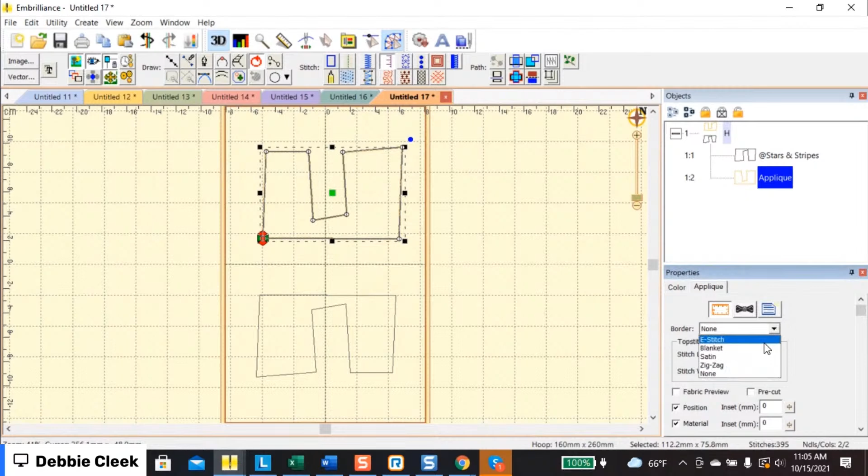If I wanted to put Halloween or the Hendersons or whatever I want in there and fill this or make this applique. There we go. Those are your first tools in the pathing toolbar.

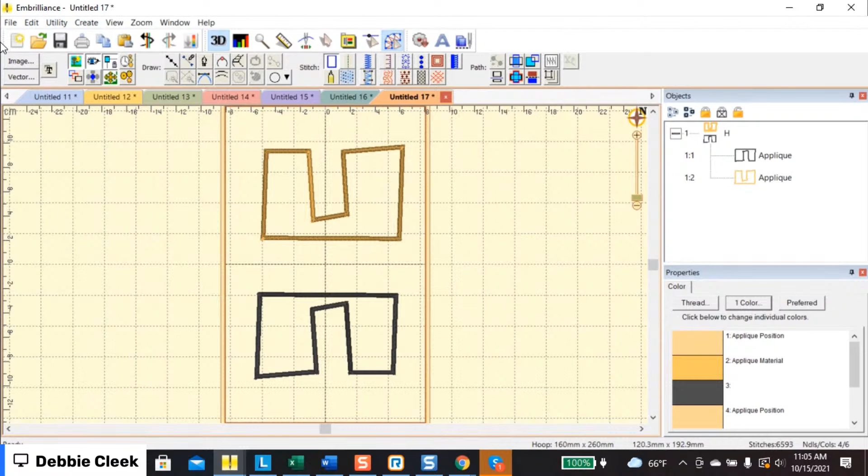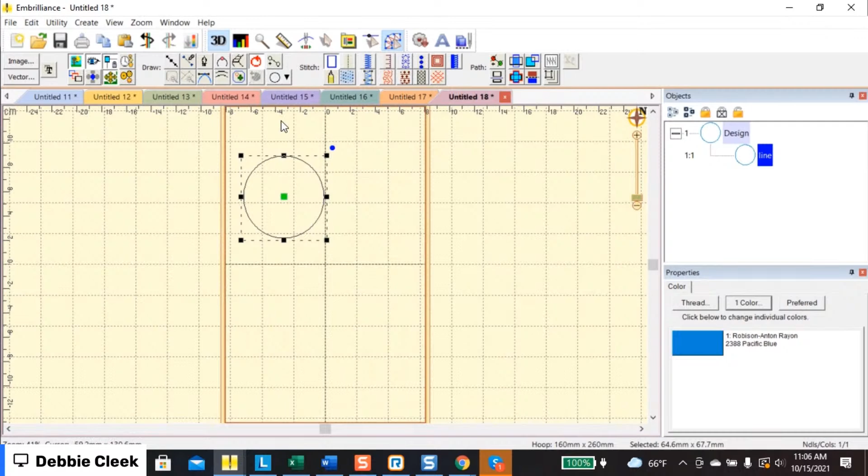The next one is the AND, to recreate objects where they are overlapped. Let's get a couple circles for that. Copy, paste, let's change the color. Let's select all - over here in our object tree, we'll select all. And now we'll select that, and you see what it's given me? It's given me both circles and also an object where those two circles were overlapped. So I have 3 objects here. That's really good if you're wanting to do some shading or something like that of overlapped areas. That works out really, really nice.

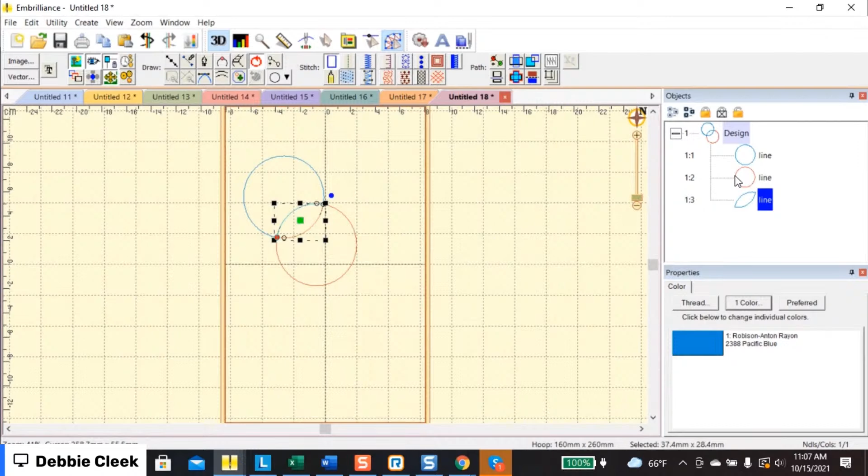I'm going to copy and paste the 2 circles onto a new design page. And then we're going to talk about the union. What that gives me is an outline that encompasses everything on my design page, all my objects on my design page. So right now I have the 2 circles.

Select all and go to union. Now see it's given me an outline that encompasses all 3 areas on my design page.

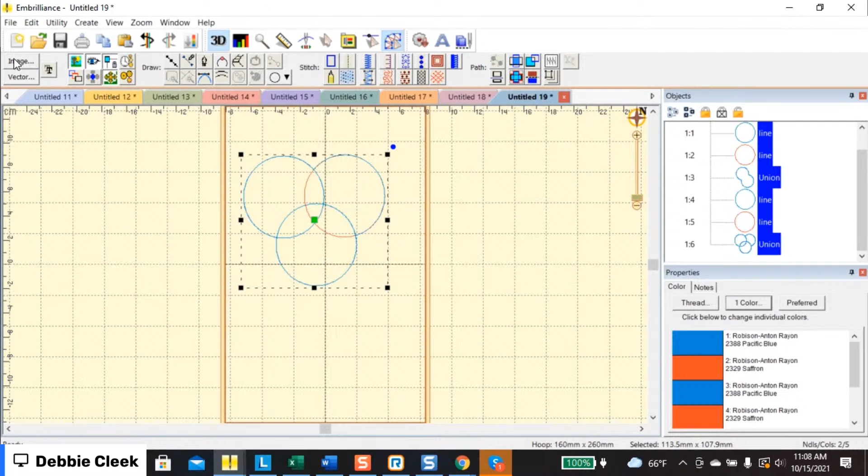Okay, let's get a new page. Let's paste those circles again. Let's move them closer to the center and zoom in just a tiny bit.

This one will subtract whatever is there, so it's taken the whatever's on the bottom, it will remove the overlap on the top. That's great when you're digitizing designs and you want to know how you remove those overlapping stitches. You use this tool to remove the overlapping design, so you don't have to worry about removing the overlapping stitches.

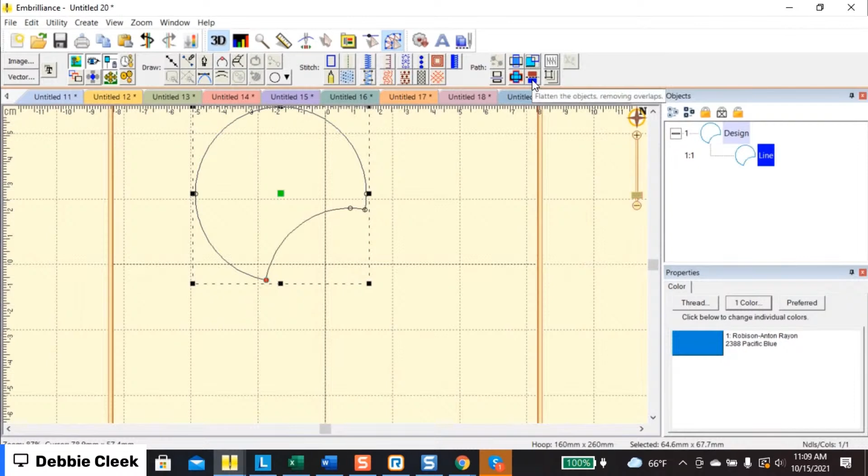Okay, let's get a new design page. Let's paste those circles again. This time let's go to flatten. This does the same thing, but it keeps both objects on the design page. So there again, it's just another tool.

If I want to remove my hidden stitches from my design, it's easier to remove the artwork oftentimes than to remove the hidden stitches down the road.

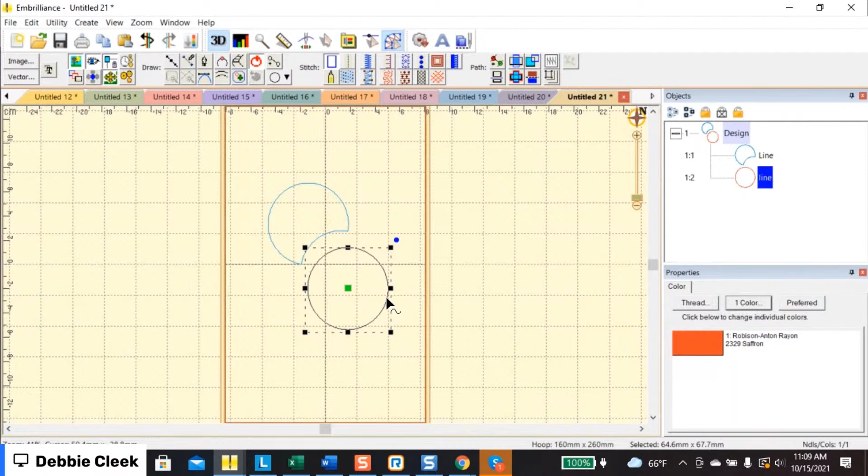Okay, one more design page. Now we're going to create an outline from stitches on the design page. I'm going to go to my fonts because I have several. I have all the programs here, so I have several built in. I am looking for LMNO. I don't see it here for some reason. Let's pick Merrily Boney. Let's click on View and turn my hoop off so it doesn't get confusing.

Let's go back to our level 3 toolbar. Let's select my text. We're going to create an outline from stitches on the page, and then we're going to select that outline and right-click Copy, right-click Paste.

And then I'm going to apply a run stitch to that, and I'm going to change the color to Shocking Pink. And then I'm going to take this other outline here.